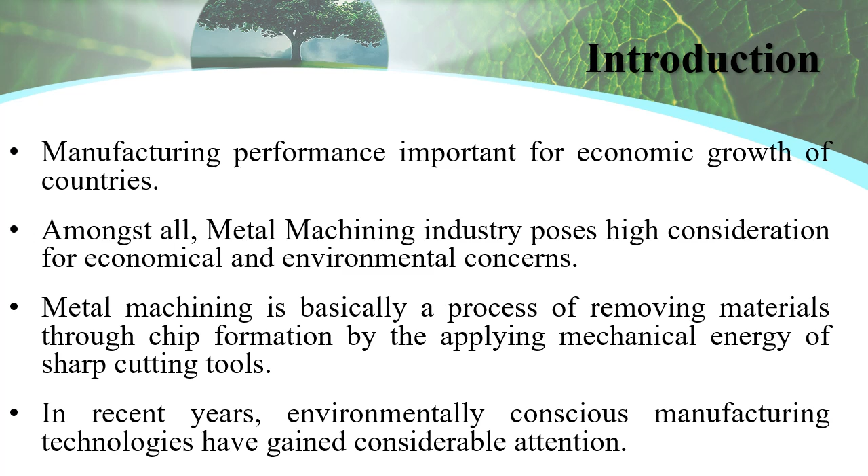In this era of globalization, manufacturing performance is important for the economic growth of countries, wherein the metal machining industry poses high consideration for sustainability issues. As we all know, metal machining is basically a process of removing materials using sharp cutting tools. However, in recent years, manufacturing technologies with environmental focus have started gaining significant attention.

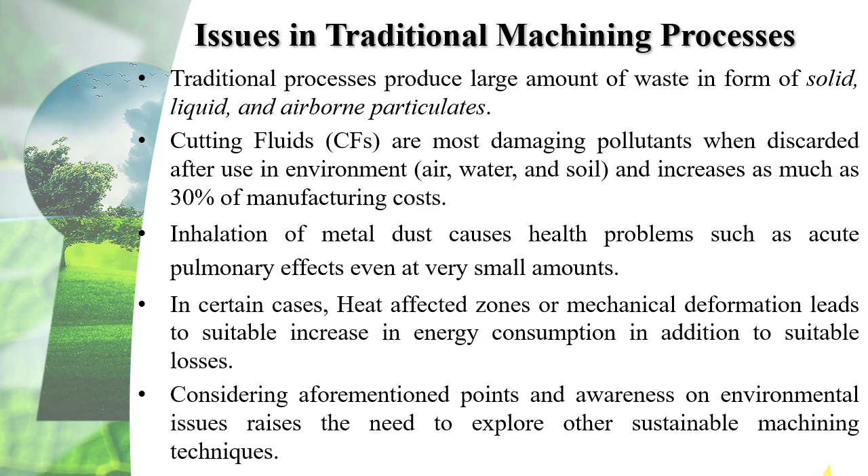Despite high productivity, traditional machining processes pose various environmental concerns. They produce a large amount of waste in the form of solid, liquid, and airborne particulates. Cutting fluids especially damage the environment and increase manufacturing costs by as much as 30%. Moreover, inhalation of metal dust causes health problems in workers. Additionally, heat-affected zones or mechanical deformation lead to a significant increase in energy consumption. Thus, all the mentioned issues indicate the need to explore other sustainable machining techniques.

Biomachining is a green manufacturing concept that utilizes microorganisms to remove material from the surface of a workpiece. Microorganisms either consume corrosion byproducts or produce corrosive species during their metabolism, which depolarizes anodic or cathodic reactions. The process has gained significant importance over conventional machining methods, especially due to minimal energy consumption, and further eliminating the use of hazardous cutting fluids.

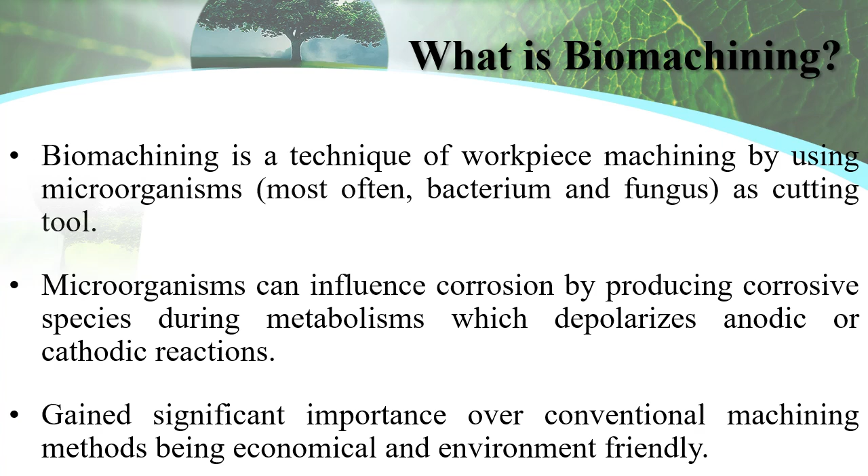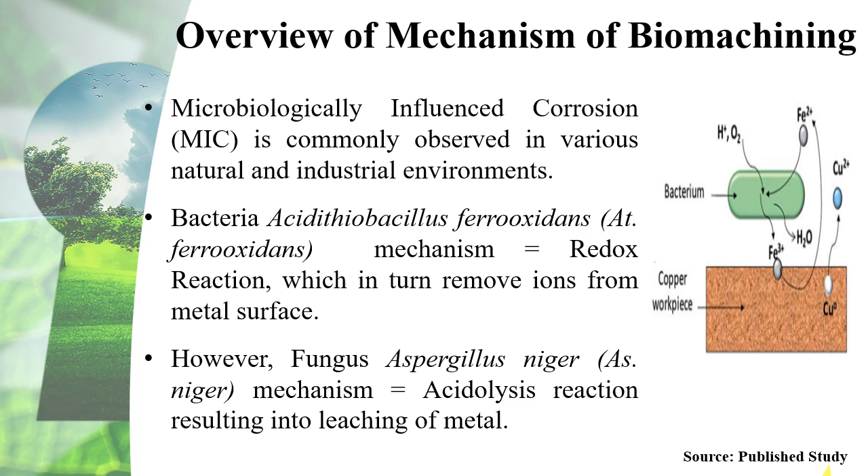Microbiologically influenced corrosion is commonly observed in various natural and industrial environments. The biomachining mechanism, in case of bacteria, follows a redox reaction, where ferrous ions get converted to ferric ions, leading to metal removal from the surface. However, in case of fungus, an acidolysis reaction takes place where sucrose is converted into citric acid, resulting in leaching of metal. The details of the mechanism have been provided in this published paper for further reading.

This slide presents details about published research papers within the domain of biomachining. As of now, microorganisms such as Acidithiobacillus ferrooxidans and Aspergillus niger have been widely considered for studies in comparison to other bacteria or fungus. However, different materials utilized for studying the influence of different bacteria or fungus have been copper, iron, and nickel, with less focus on alloys and ceramics. Lastly, the most commonly studied physiochemical indicators have been specific metal removal rate and surface roughness, with operating parameters being shaking rate, machining time, pH, and ion concentration of solution.

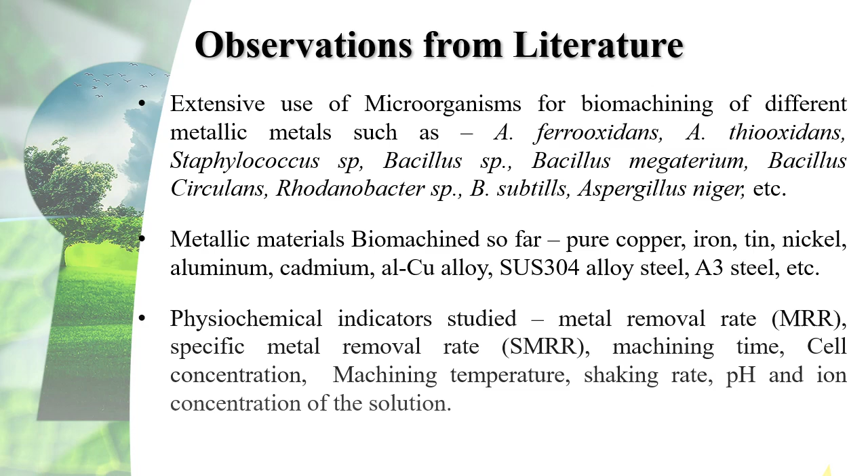The graphs presented here highlight SMRR and surface quality trends from the published literature. From the first graph, it can be inferred that material removal rate is good at lower pH, being acidic in nature, and tends to decrease as pH becomes basic. However, the second graph highlights better SMRR results for Aspergillus niger and Acidithiobacillus ferrooxidans in comparison to other microorganisms. As far as surface finish is concerned, the smoothness is quite obvious based on before and after machining SEM images.

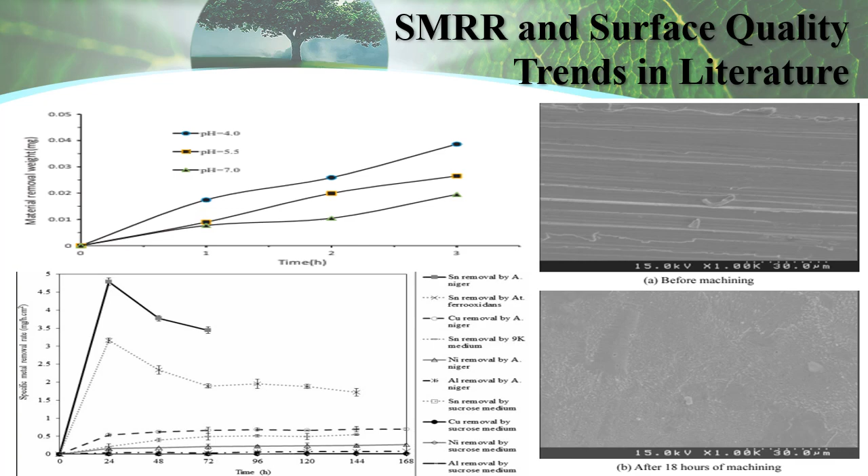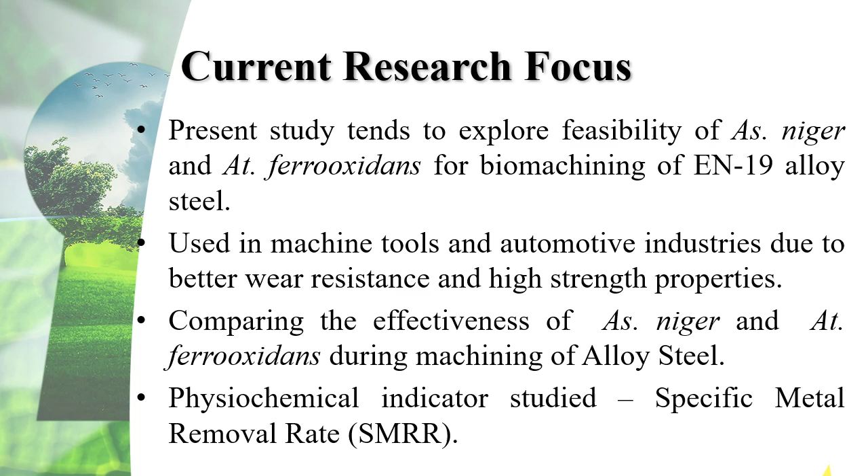Based on the initial literature survey, this study tends to explore the feasibility of biomachining on EN19 alloy steel due to its significant importance. Further, efforts have been made to evaluate the performance of Acidithiobacillus ferrooxidans and Aspergillus niger in comparison mode. To begin with, only the SMRR indicator has been considered in the current context.

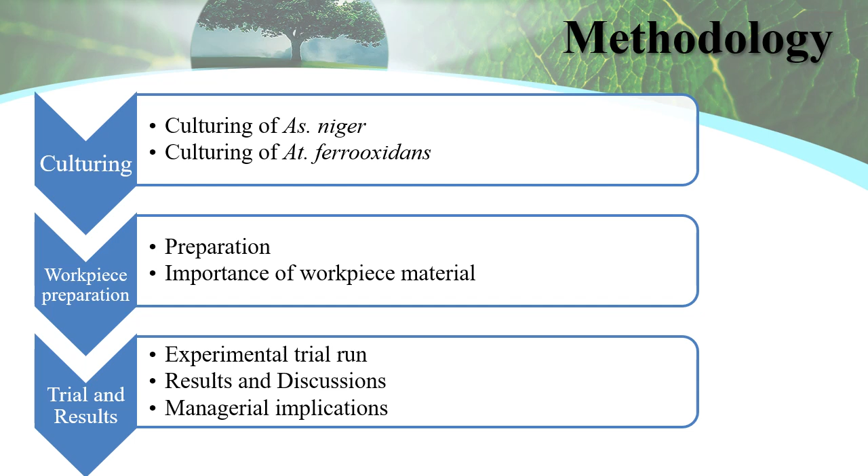The study has been conducted in three phases to achieve the desired results. Firstly, culturing of bacteria and fungus has been done to be utilized for machining. However, we will be providing only brief details on the culturing process, as the entire process is available in the paper for detailed reading. Secondly, details on how the workpiece has been prepared for further processing have been given, along with the SMRR calculation formula. Lastly, details on results with desired discussion have been provided based on trials conducted.

Initially, a solution in plate media has been prepared containing 5 ml MTCC sample and 10 ml PDA solution. Then, another flask was prepared containing 250 ml of sterilized PDA solution. Finally, the solution in plate media was added to the flask having PDA solution. The flask was then sealed and kept in an incubator at 35 degrees Celsius for 7 days.

After that, another culture flask was obtained having 10 ml of final solution for the desired machining process, wherein a similar amount could be taken for each experimental condition.

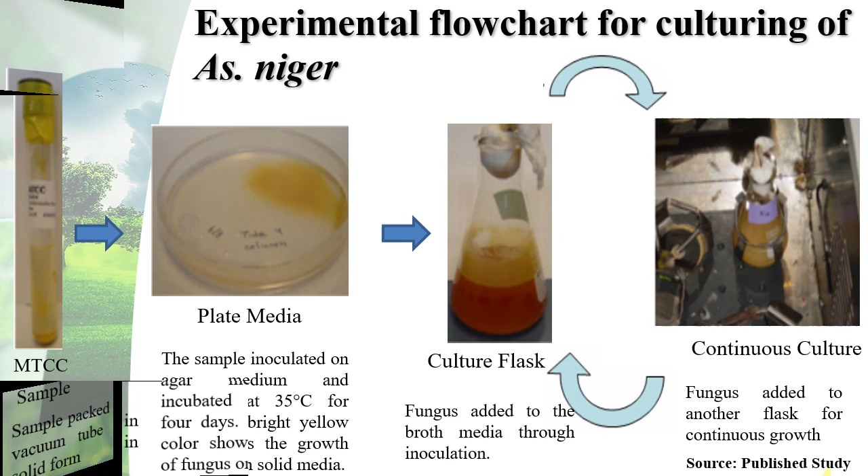Initially, the salts as mentioned in the paper were added to a flask having distilled water, which was then autoclaved at 121 degrees Celsius for 30 minutes, in turn providing us with solution A. However, solution B consisted of 160 grams of ferrous sulfate and 1000 milliliters of distilled water mixed thoroughly.

Later, half part of solution A was added to 1/4 part of solution B, along with 25 milliliters of bacteria broth. Finally, the prepared solution was placed in the incubator at 35 degrees Celsius for 5 days for better growth to be utilized for machining.

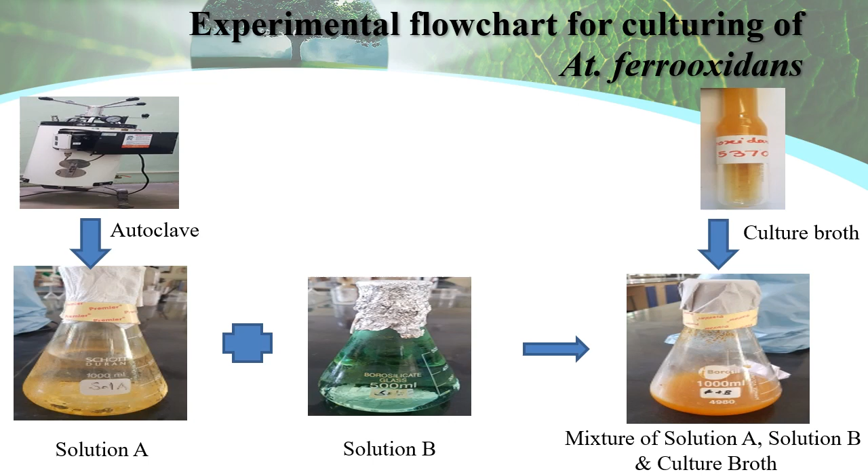As already discussed, EN19 alloy steel has been utilized in an effort to extend my PhD work, having worked on the same material. Separate samples from a cylindrical bar were prepared for machining with different microorganisms, each having 22 mm diameter and 5 mm length, with total surface area of 11 square centimeters.

Finally, the samples were dried after rinsing them with distilled water and 75% ethanol before further use.

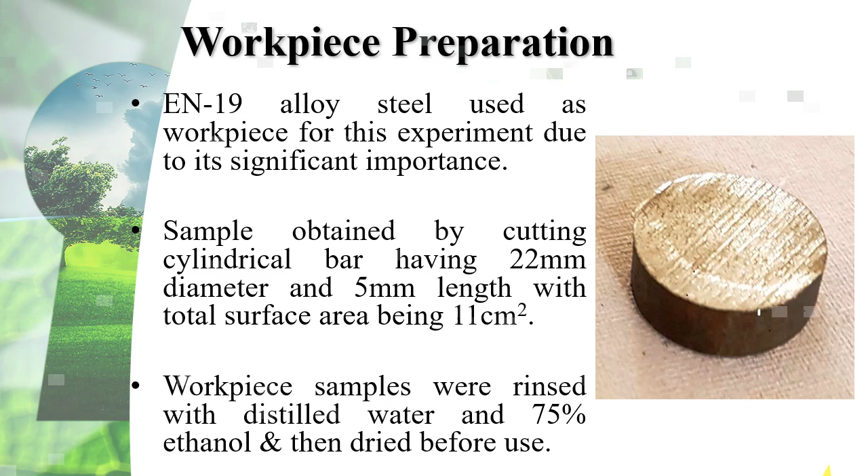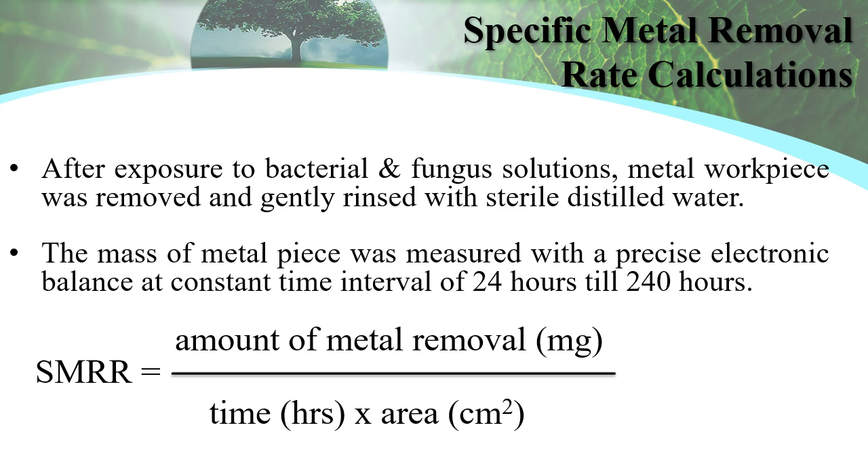In order to calculate metal removal rate, the samples were first rinsed with sterile distilled water after removing from microbial solutions. Then, mass of the workpiece was measured with a weighing machine. Finally, based on the mass before and after machining, SMRR was calculated based on the given formula.

So the current table provides an overview of SMRR results in case of fungus. The experiments were conducted over a period of 8 days, wherein readings were drawn after a regular interval of 24 hours. The successive weight readings were observed, based on which change in weight and SMRR was calculated. Thus, the highest SMRR value has been 0.098 mg per hour square centimeter, which decreased to 0.040 units after 192 hours.

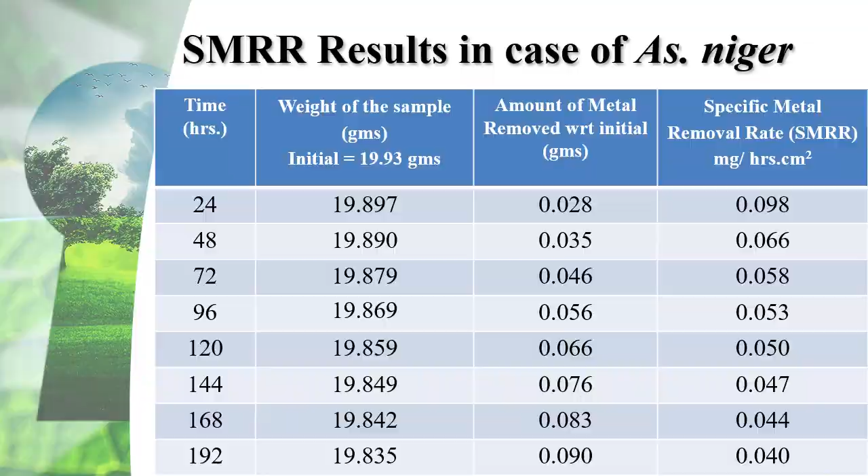Similarly, SMRR results have been tabulated here for bacteria. Based on the analysis, the highest SMRR value has been 0.227 mg per hour square centimeter, which decreased to 0.203 units after 192 hours.

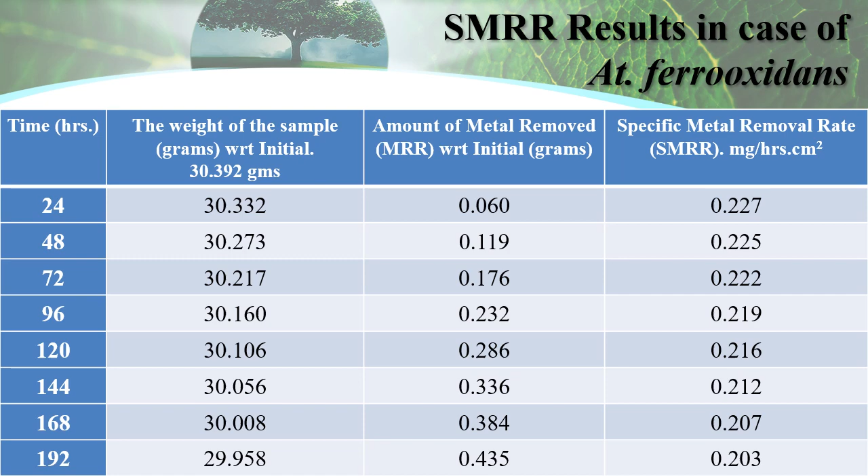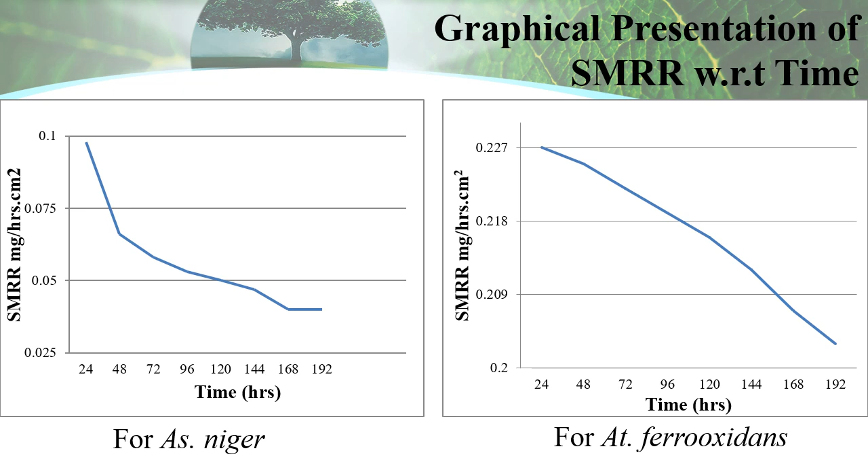The study presented the feasibility of both bacteria and fungus for machining alloy steel, due to continuous weight reduction. However, decrease in SMRR may be either due to less availability of sucrose for acidolysis, or change in pH.

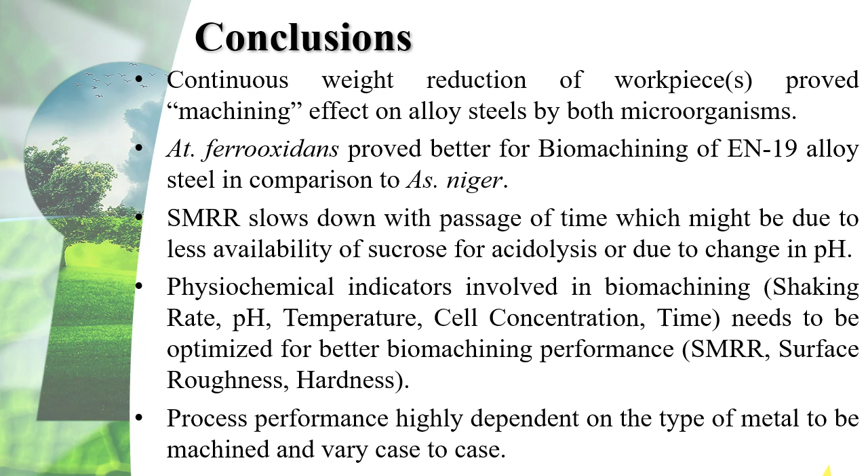Further studies will be oriented towards optimizing physiochemical parameters such as shaking rate, pH, temperature, cell concentration and time for better biomachining performance.